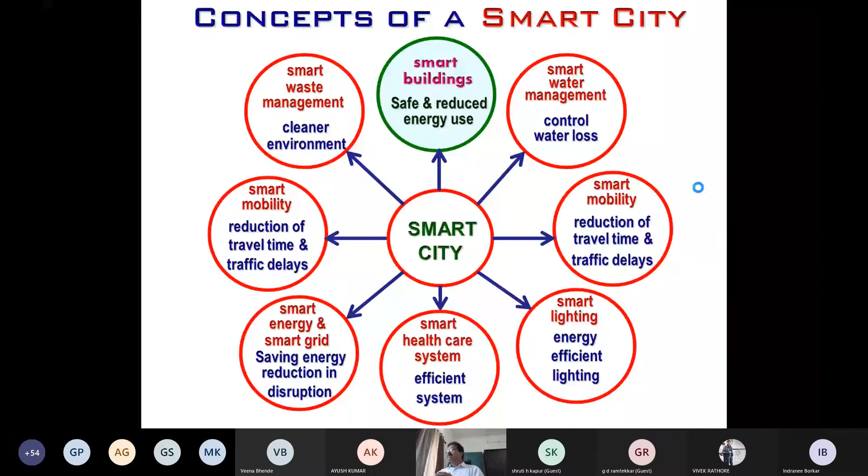Out of this, I will only focus on smart buildings, and that too, smart buildings where a building should be safe against various forces and also energy efficient. I will take up smart buildings from the view of safety against various natural and man-made forces.

What are those natural and man-made forces that we consider in the design of a building? Broadly they are divided into dead load, imposed load. It can be live load, it can be machine imposed load like this. Dead load is the self weight of the member and structural system.

Then wind load, because wind blows and has its own speed as gust velocity, so that puts force whenever some obstruction comes. We can understand the effect of wind in the sense that when huge wind blows, all those hoardings which looked very strong fell down. So wind has a natural huge force that must be taken care of during the design of a building.

Then there is one very important force: seismic force. Though it occurs very rarely, once in many years, whenever it comes it takes its attention, and buildings shatter because of that.

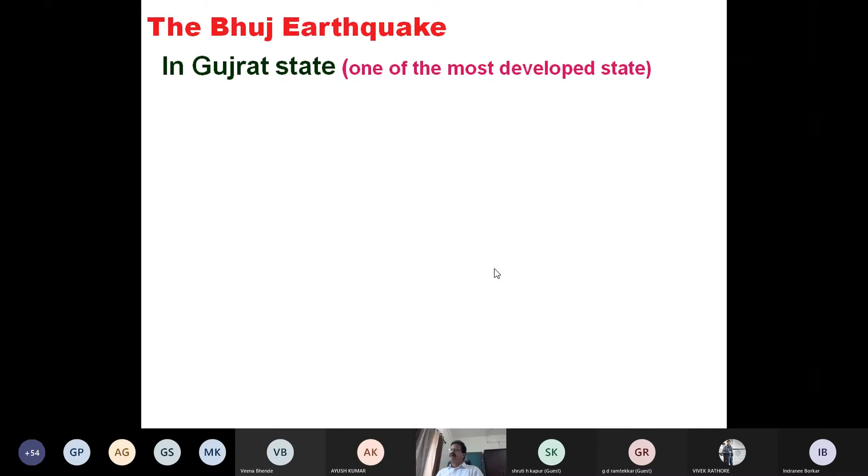In Gujarat state, which is said to be one of the most developed states so far as infrastructure and people's income point of view, an earthquake rocked the cities Ahmedabad, Bhuj, Anjar.

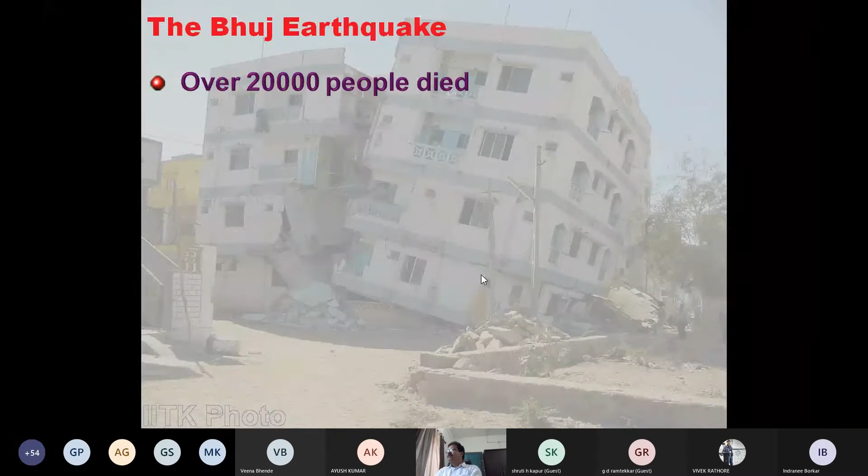The statistics then say that over 20,000 people died, over 1,65,000 people injured, more than 20,000 people sustained serious injuries, more than 100 multi-storied buildings collapsed like playing cards in Ahmedabad.

This happened for the first time, that a multi-storied building made with RCC structure, which is said to be a very good structural and configured system, collapsed due to that earthquake. This was an eye opener and a warning to the system.

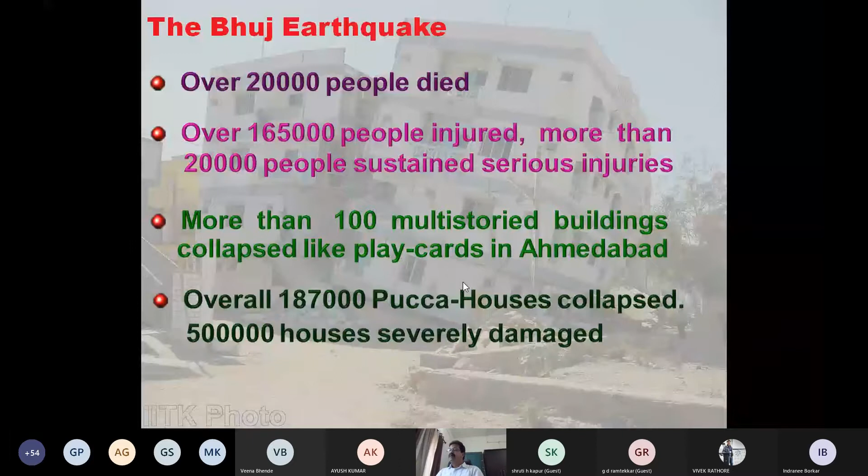Overall, 1,87,000 pucca houses collapsed and 5 lakh houses were severely damaged.

We can think of the losses in terms of money—it is huge money that was lost because of that earthquake. But it is more than that. We should not only think of the losses in terms of money, but many things happened, and irreparable losses took place with families. Somebody lost their family members, and that was irreparable. So we should not only think of the losses in terms of money, but in other social terms—irreparable losses take place if a building is not safe against such earthquake forces.

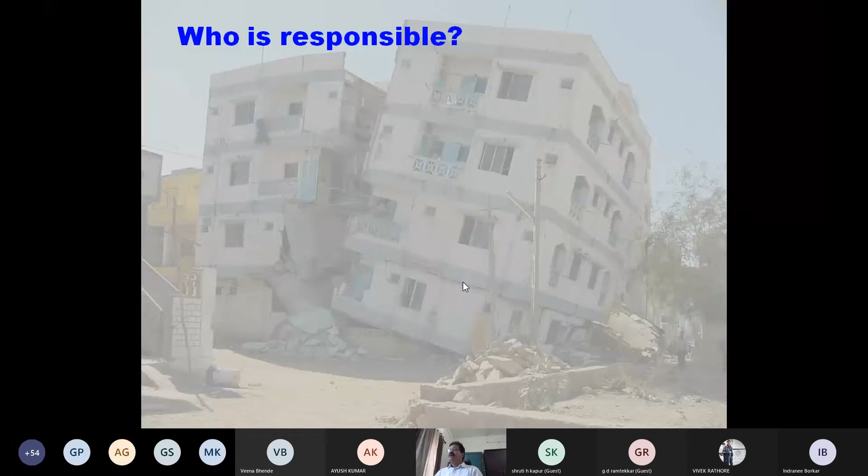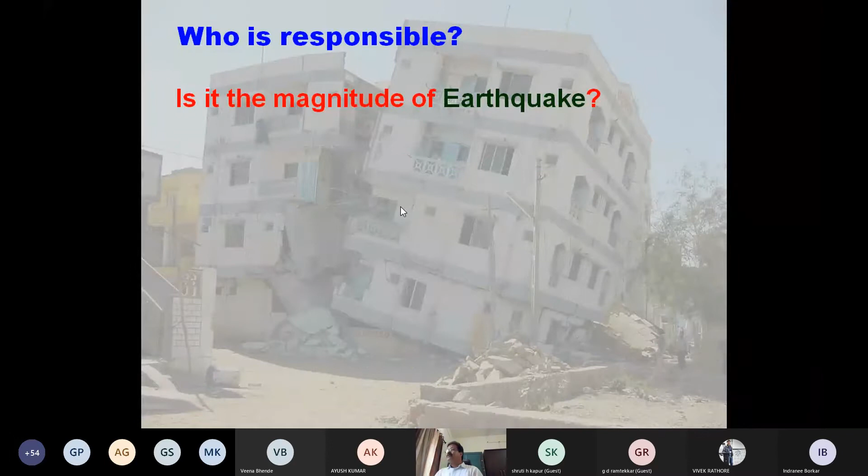So let us go into a bit of depth about who is responsible. It is not about blaming, but thinking about what went wrong and who should logically be held responsible. The two questions that come to mind are: is it the magnitude of the earthquake that caused this devastation, or the magnitude of negligence on the part of civic authorities, architects, engineers, and builders?

Here, I would like to say the role of civic authorities, architects, engineers, and builders comes very important in case of a smart city. If a city is made a smart city, then all these authorities, technocrats, and architects should be very careful and very responsible, and should behave responsibly.

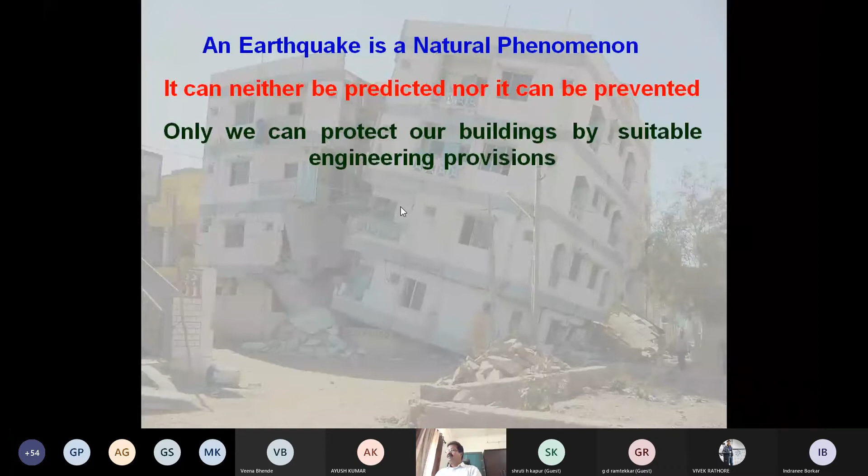Now, about the earthquake, it is well known that an earthquake is a natural phenomenon. It can neither be predicted nor prevented. One should be very clear about this. The only thing we can do is protect our buildings through suitable engineering provisions. The irony is that engineering knowledge exists - not complete, but at least sufficient knowledge is available these days which can be employed so that loss of life or property due to earthquake can be avoided.

But the enforcing law doesn't exist here. Actually, we require an enforcing law where the people who are constructing should be held responsible and should be monitored, ensuring that all these earthquake provisions are taken care of during construction.

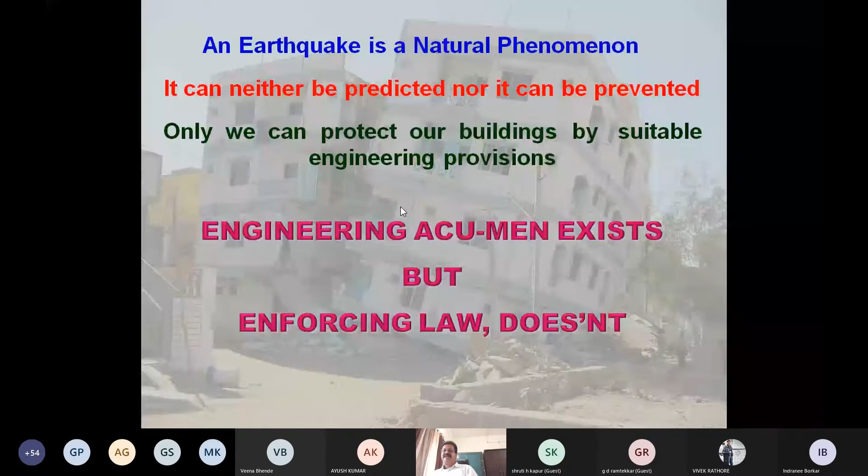So now going into that - is this slide changing? No. Yes, now it is coming.

Let us have a glimpse of the construction practices which resulted in these calamities. So if we see, there come the poor construction practices basically done. Though we know all the background science and understanding of how earthquake force affects the building and where we should take more care during construction, it all goes in vain during construction. It is not taken care of that way, and this is what happens.

This is Tagore Park apartment building in Ahmedabad, G+4 story, constructed in 1992. Here this column failed - the buckling of reinforcement due to crushing and spalling of the concrete at the top of the ground floor column. Basically it is the ground floor, the stilt floor of a building, which is used for parking purposes and everything, that becomes most vulnerable.

Under the action of forces, it is the horizontal force or the shear that hits maximum on this ground floor story at the top portion. This particular column shows the poor construction practice. Here we are not seeing the rings available.

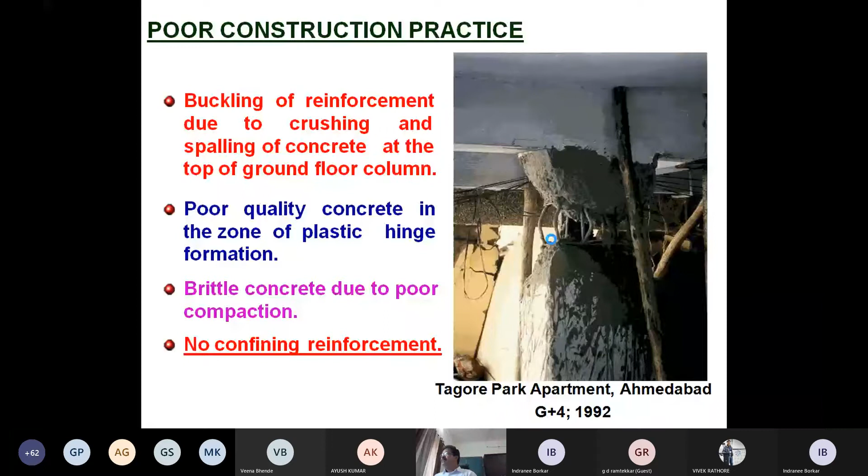Then second thing is about a building called Punjal apartment in Ahmedabad. This is having a lift core - all four walls of the lift core are made using RCC, reinforced cement concrete. This is very strong so far as lateral movement or lateral vibrations due to earthquake are concerned, so they themselves are very strong and can take a huge amount of force.

But the surrounding columns - if they were properly connected with this lift core, all these columns could have been saved. But it looks like in this building that all the other columns were not properly connected with these shear walls. Not properly connected means the beam connecting all the other columns was not embedded - the reinforcement was not well embedded in this lift core. That is what happened during the vibration due to earthquake - the connection failed, and all these other columns collapsed due to the earthquake forces, resulting in the collapse of the building with 4 casualties.

So there was no mechanism to transfer force to the lift core. No anchoring or continuity of slab and beam reinforcement to the wall of the core. Shear failure of columns led to the collapse as the core was not effective. This is how the mistake took place and resulted in 4 deaths.

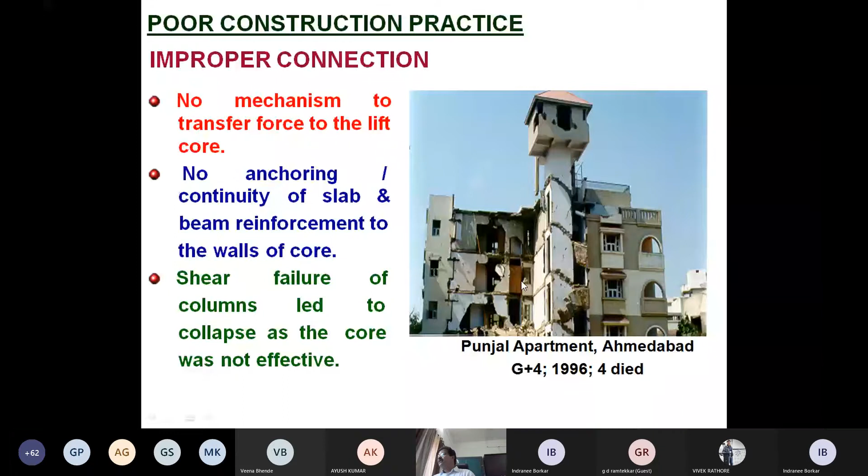This is another poor construction practice where this corner column failed during an earthquake. Corner columns are subjected to the highest amount of forces because the seismic center of mass and center of rigidity don't match in one point, causing the building to twist along with vibrating—this is called the torsional effect. Because of this, corner columns are hugely affected when the building is under twisting motion. What happened here, at this location, is a beam-column joint failure.

This vertical member is a column and this is a beam. Under the action of earthquake forces, failure may take place either in the column or in the beam, depending on reinforcement detailing. But in this case, the column was weaker compared to the beam, so when the earthquake struck, failure took place in the column.

Remember, failure of a column is catastrophic—it means the whole structure will collapse. Whereas failure of a beam is localized, only that beam fails, nothing else. Failure of a slab is even more confined, a small localized failure. Here, column failure took place, and because of that the whole building collapsed.

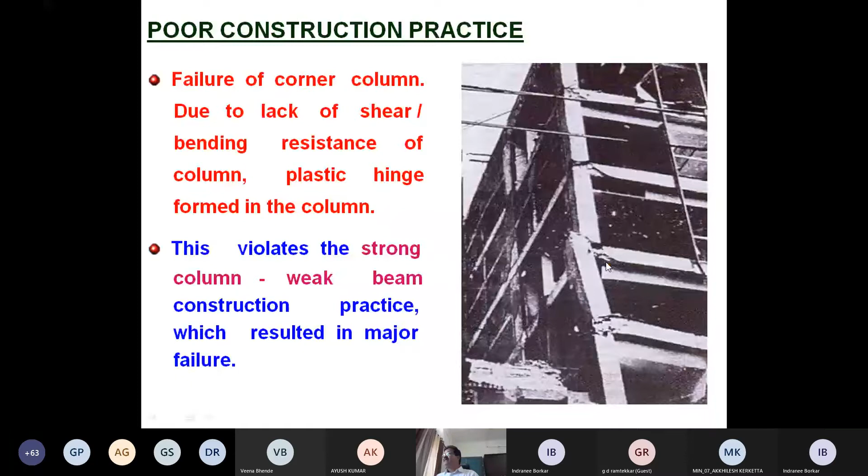This violates the necessary regulation for seismic design: the column should be strong and the beam should be weaker compared to the column. This means whenever a beam-column joint fails, the failure should take place in the beam rather than in the column. Here, the failure took place in the column, and that is how the collapse of the building occurred.

Another kind of failure: this is a G+4 story RCC framed structure constructed in two stages—first two stories built, then after a few years the later two stories were added. Because the upper column was not properly anchored with the lower column—probably due to insufficient length of reinforcement available at that time—people said 'yeh chalta hai' and constructed it that way, leaving a weak joint between the older column and the new column above the second story.

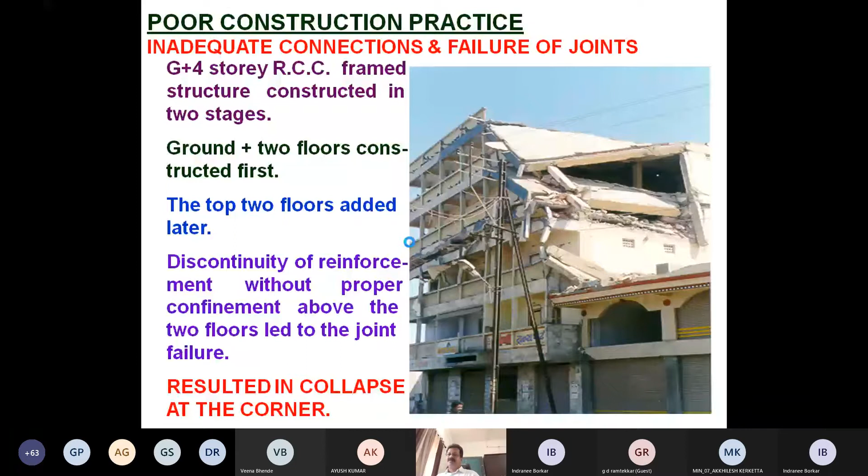This is another example, of a short column. In the normal case, there is a boundary wall, and naturally there is a gap between the floor and this boundary wall. But as soon as this gap is closed up like this, this part of the column becomes a short column.

From the point of view of any gravity load, like dead load, live load, imposed load, and even from the wind force point of view, having a small or short column is a good thing. It makes the column stronger and stronger. But when it comes to earthquake, it is just the opposite.

An earthquake vibrates things, causing a deviation of one part of the column with the upper part. The magnitude of deviation is whatever the earthquake's magnitude dictates, and the more the deviation, the more the sway of the column, resulting in a huge amount of force.

As civil engineering students may know, the moment generated in case of a sinking support of a fixed beam is 6EI delta upon L square. Here, L is small, so 6EI delta is large upon a smaller L square, and thus the magnitude becomes too large, just because of the shortening of this column. This is the short column effect.

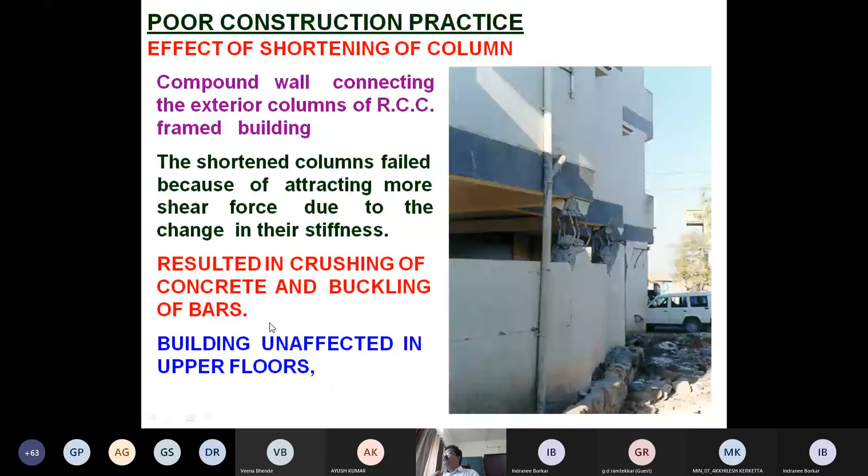Civil engineering people may understand the concept of development length, that reinforcement must be embedded within the concrete by a certain amount to develop a particular quantity of stress within the reinforcing bars. This is a classical example where the reinforcement was not properly embedded in the concrete and it just slipped away from the concrete. It did not take any resisting forces, no stresses were generated within the bars, and it just pulled away from the system as if it was cast on a soil mass, something like that. This happened, and because of that, this particular column failed.

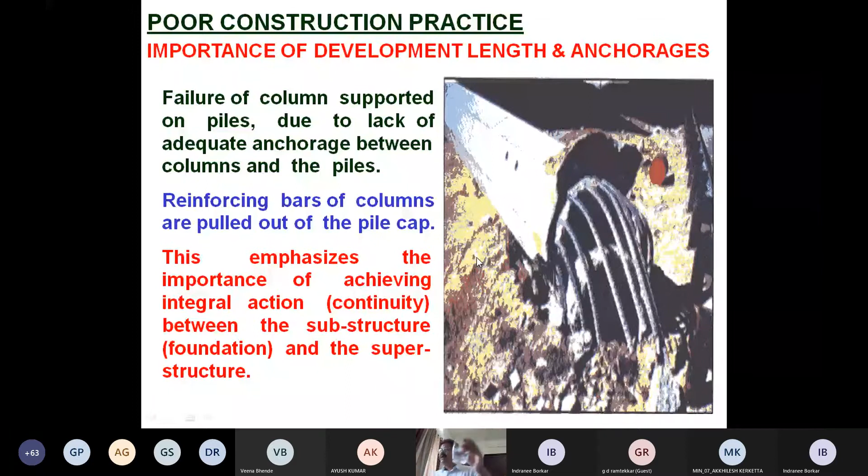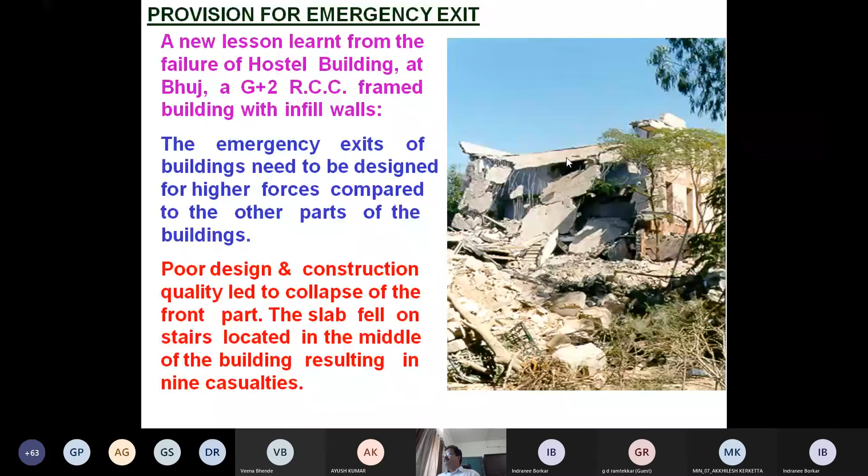This is another example showing the effect of proper connectivity of the shear wall. This is the lift core wall. Here there is a staircase connected to a lift core where a lift is available. Since this lift core is made out of RCC and properly connected with other parts of the building, all these columns were properly connected through these beams with the wall.

What happened due to earthquake? The maximum force has been attracted by this lift core portion, and at the cost of that, this lift core failed. This lift core got huge cracks, but all the other columns are saved because of that, and hence the building is saved from collapsing. So this is how proper connectivity makes a difference and saves a building from collapse.

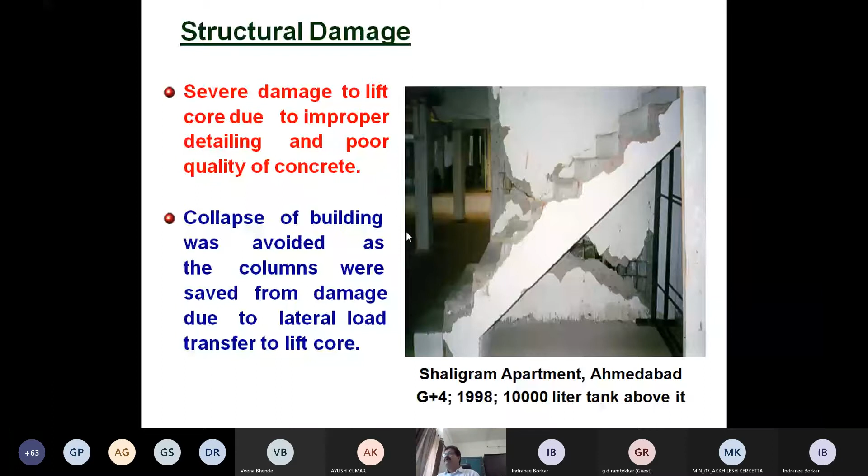Here it is just opposite to that. This column, sometimes we may think it is a failure, but it should not be looked at like that. It is actually passing, because this particular column is so properly confined by the reinforcement that even after this kind of buckling and vibration, the concrete inside the column has not come out. And when it has not come out, the capacity of this column to take the vertical load still remains there, and because of that, the collapse of the whole building is saved.

The building is saved from the collapse. And that is how confinement of the concrete is of prime importance in case of earthquake resistant buildings.

So we must take care that civil engineering faculties appreciate these things, that we do not give much importance to the rings in columns or shear reinforcement in beams. In case of beams, sometimes we calculate the shear reinforcement required, but never do we calculate the size and spacing of the rings required in a column. It is a neglected thing.

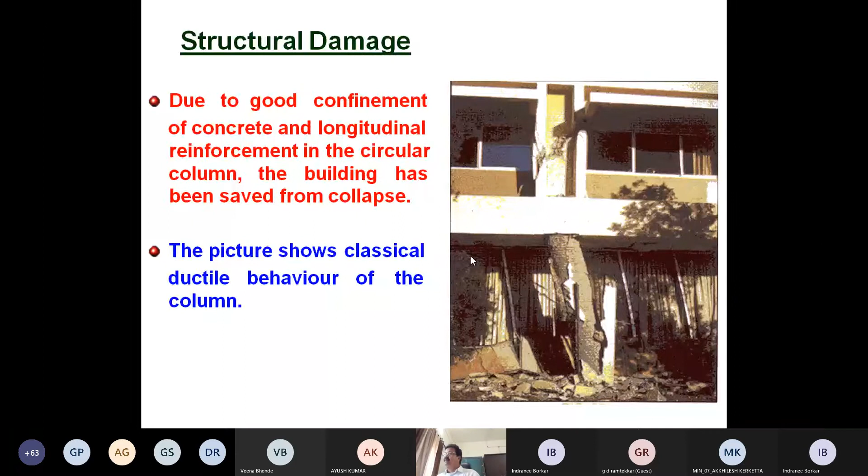So in this way, if I want to ask what kind of behavior we want from a building, this actually shows the kind of behavior we want. This is the example of the twin towers, and in 2001 when it happened, people posted this kind of animation. So basically we require a flexible structural system. Flexible means large deformation is there, but its capacity to take the vertical gravity load should still remain. If a building is that kind of flexible, that large deformation is permitted, but even then it does not lose its vertical load carrying capacity, then that kind of building system is the most appropriate from an earthquake point of view.

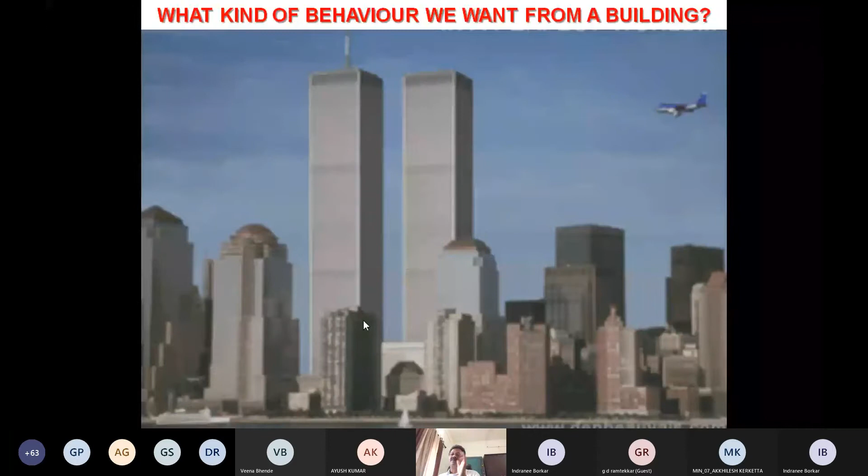Now with this understanding, let us go into the heading of the topic: required seismic considerations for buildings.

Now here an important note is there. Henry Degenkolb, who died some years back, was a noted earthquake engineer, and he said: if we have a poor configuration to start with, all that an engineer can do is only provide a band-aid to improve the basically poor configuration as best as he can.

He gave so much importance to the configuration of the building, meaning the layout plan, its vertical configuration, its horizontal configuration. He gave so much importance to that, that if the configuration is poor, not much can be done by the site engineer. A building of poor configuration will definitely give a bad result and behave very badly during an earthquake, however much attention is put in by the site engineer.

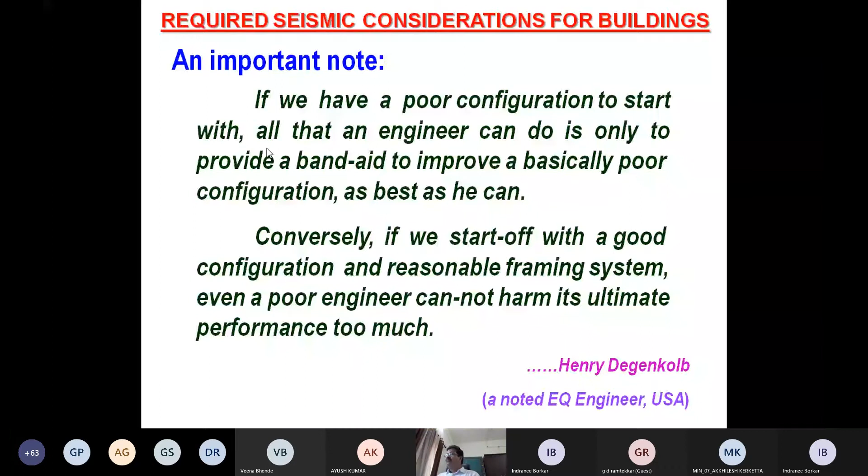Conversely, if we start off with a good configuration and reasonable framing system, even a poor engineer cannot harm its ultimate performance too much. This seems contradictory: if you start with good configuration and reasonable framing system, even if there is a poor, unknowledgeable person at the site as engineer, he cannot harm the structural system. The structure will perform well even with a bad engineer constructing it. These two sentences make it clear that configuration and reasonable framing system are the essence of earthquake resistant buildings. So now we are going into that configuration.

Seismic considerations during planning. I will talk about plan configurations, meaning how the system should be laid out in plan. So you just see all these kinds of buildings that we come across.

This is a too tall building with slender cross section, meaning the cross section is very small but the height is too large. This is another building which is too long, meaning the length compared to the other two dimensions is very large. And this is a building too large in plan, meaning its length and width are too large.

All these things—too large, too tall, too long—are not good from the consideration of earthquake resistant building. What happens whenever there is an earthquake hitting? Say for example if this building is too long. Earthquake is actually waves; it comes through the soil strata as waves with certain wavelength, and all those phenomena are associated with vibrations.

Naturally, the way one particular part is vibrated by the earthquake, another part may not have the same kind of vibration. It may be vibrated differently with a certain lag—first this part vibrates, then the vibration moves to another location. When one part was vibrating, another part came to a standstill, so the whole building is not vibrating simultaneously. Had the whole building vibrated simultaneously, the behavior would have been more proper.

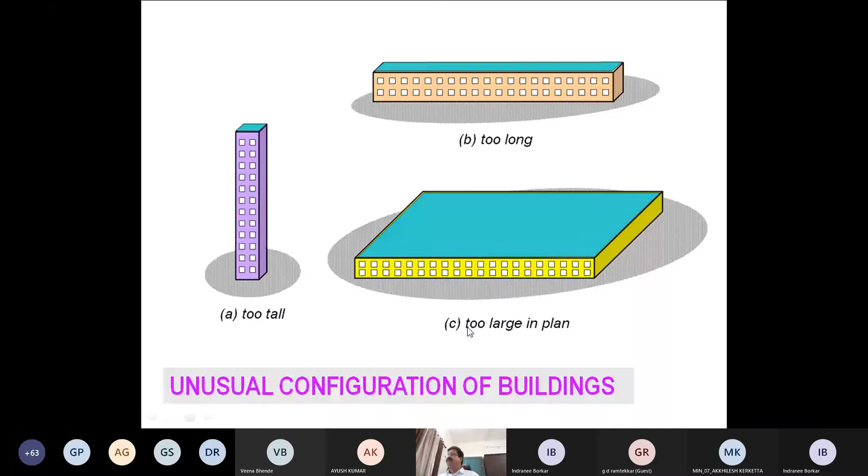This is how, in Bhuj, a building that was too long had one part collapse because of this consideration—that it was too long a building.

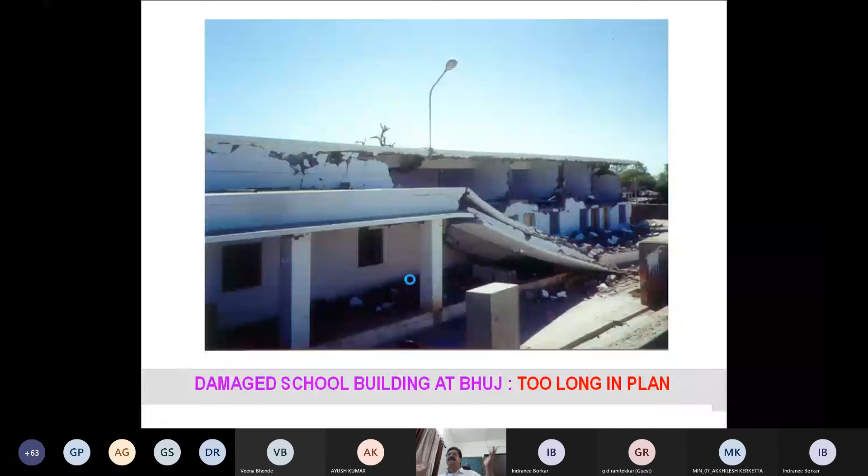What should we do in such cases? Naturally, big buildings are the need of the hour, so large, too long, too large buildings are actually being constructed. Under these conditions, can we give a separation joint or construction joint at various locations, so that when this part is vibrating, the whole vibrates together, and it doesn't matter whether another part is vibrating or not.

In that case, I can say this part as a whole is vibrating, this part as a whole is vibrating, and this part as a whole is vibrating. Since there is no connection between them, the vibration of one part does not affect the vibration of another.

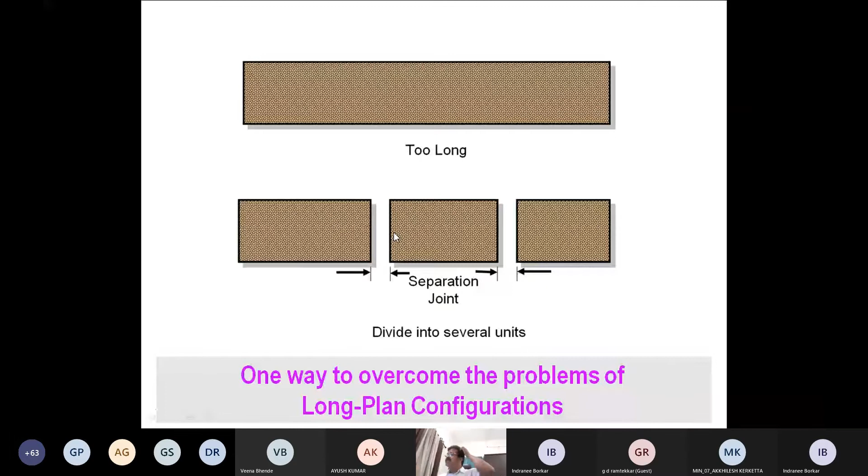Each part of the building vibrates in its own way with its own capability, and this creates additional stresses because some parts vibrate while others do not. This lagging of vibration creates additional stresses. A separation joint can be provided in such situations if the building is too large, allowing it to behave well under earthquake.

There is another kind of building - many buildings are L-shaped, T-shaped, cross-shaped, I-shaped or E-shaped. Many such shaped buildings exist in government, private, and public sectors. I already gave one example where there was a T-shaped building where the T portion collapsed during the earthquake. Actually, what happens?

We do not know the direction of vibration that will occur due to an earthquake. Say for example, this is an L-shaped building, and if the vibration is taking place as my cursor is moving, this is the direction of vibration. Naturally under this condition, this particular part has different and larger stiffness compared to this portion, because this is smaller in width and its stiffness is much smaller compared to the stiffness of this portion under this kind of vibration.

If this kind of vibration is taking place, then this portion becomes too stiff compared to that portion. That is how the stiffness change occurs in the building, and under earthquake effect, this sudden change in stiffness makes the difference, resulting in concentration of stresses at such locations.

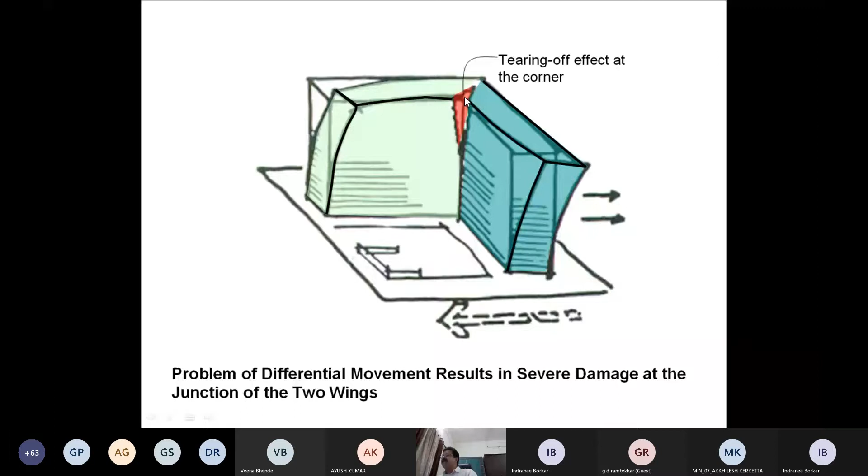So a building should be constructed in that way when it has a reentrant corner. Sometimes, as I said, this corner is severely affected and subjected to stress concentration and failure. So this corner portion must be given due attention, and the beams and columns of this portion should be designed accordingly so that failure due to this stress concentration does not take place. Alternatively, you construct in that way, but naturally that kind of construction will be costlier compared to normal.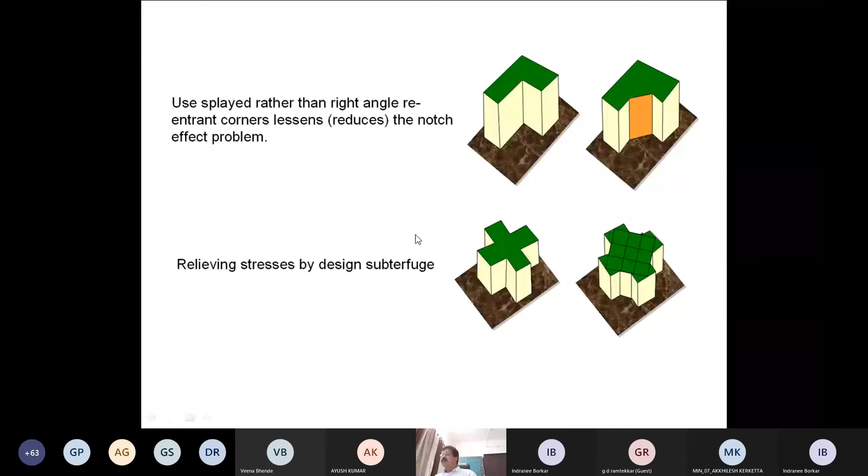These are the code provisions as per IS 13920, ductile detailing provisions, where these kinds of figures are also given. If your building is L-shaped, provide a construction joint like this. If it is T-shaped, Y-shaped, or E-shaped, similar construction joints can be provided.

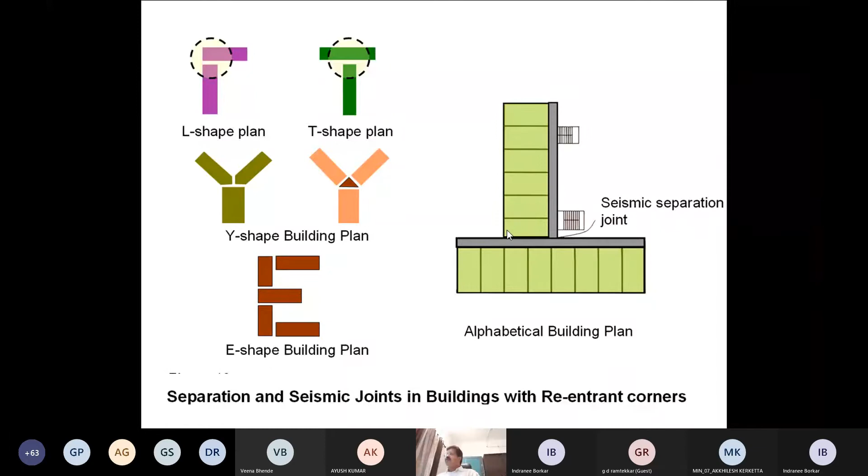Now let us come to another concept of the building, that when a building vibrates. As per vibration theory, vibration means the mass of the building is vibrating, and as the mass vibrates, it is under acceleration, to and fro changing acceleration, and when mass is under acceleration, it results into inertia force.

Now, the inertia force of the whole body, if this particular building is vibrating in this way, the center of that mass, taken as the resultant location, is the center of mass, and this is the mass in which it is vibrating.

What is resisting it, what brings it back? If a system is taken away, meaning if one portion is kept here and the other portion is vibrated, what brings it back is the rigidity or stiffness of the system. That applies its own resisting force to bring it back. The resultant of that force, wherever it is acting, is termed as the center of rigidity.

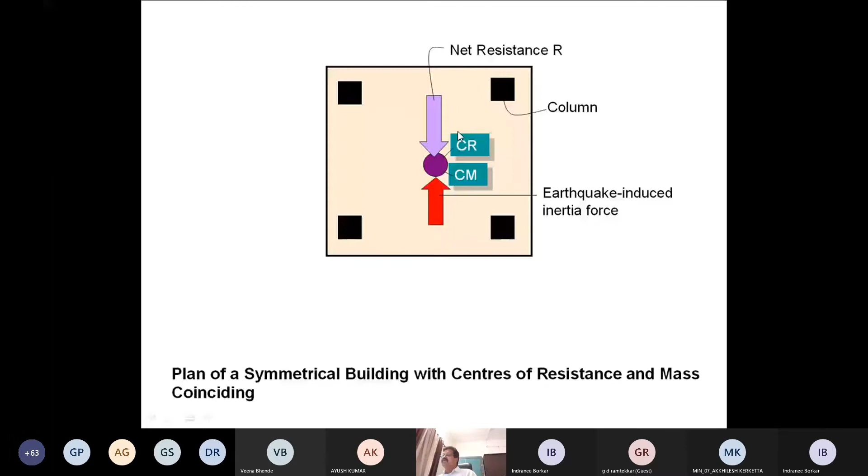As I will show in this figure, though the building looks symmetrical in plan, in construction a shear wall arrangement was made here but no shear wall in any other portion. From the rigidity point of view, this makes the system much stiffer here, so the center of rigidity or action of elastic force will be more concentrated at this location. However, the mass is distributed across the whole building, and its center of mass may be at the center of the building. So this is the action of inertia force and this is the action of elastic force, and when there is a difference in the location of these two actions, it leads to the generation of a couple.

This couple basically tries to twist the building. So a twisting or torsional effect is an additional thing that comes up because of this asymmetry of the system, where the elastic force concentration at the center of rigidity does not coincide with the center of mass. This leads to extra twisting of the system, creating extra stresses particularly in the column portions, leading to failure of the structure.

One such example I gave earlier, where because of this twisting the building collapsed. Had this been made symmetric in plan instead, its center of mass would pass from this location.

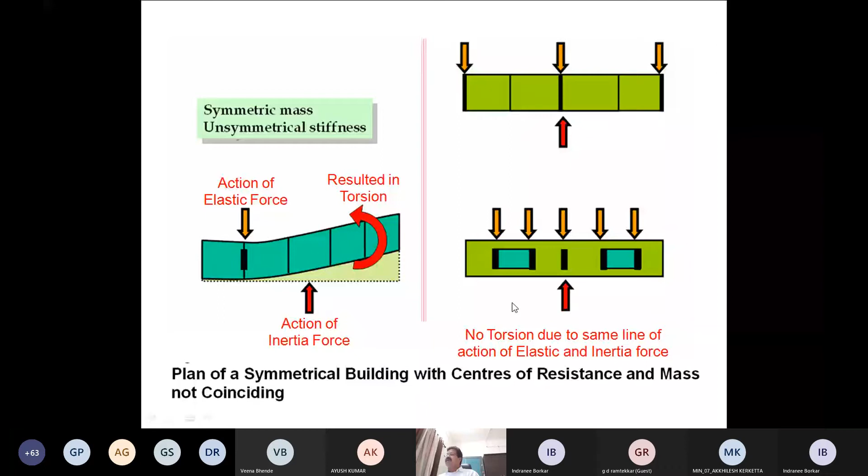As said earlier, we do not know which will be the direction of earthquake motion. It can take the building moving in this direction or in that direction. In this particular example, it seems earthquake is made to vibrate in this direction.

Now here there is a shear wall, so naturally the center of rigidity is associated with this location. However, since this looks symmetric in plan, the center of mass is somewhere at this location. So inertia force is acting here, elastic force is acting here, thus causing twisting of the building, and this may lead to high stresses in this corner column.

Now if the same building is vibrating in this direction, we do not know which one will be the direction of vibration. If it is vibrating in this direction, then fortunately the location of the inertia force and the location of the elastic force will be in the same line, and hence there will not be any twisting in the building under this kind of vibration. But this building makes sense only under a particular kind of vibration; under the other kind it is causing twisting.

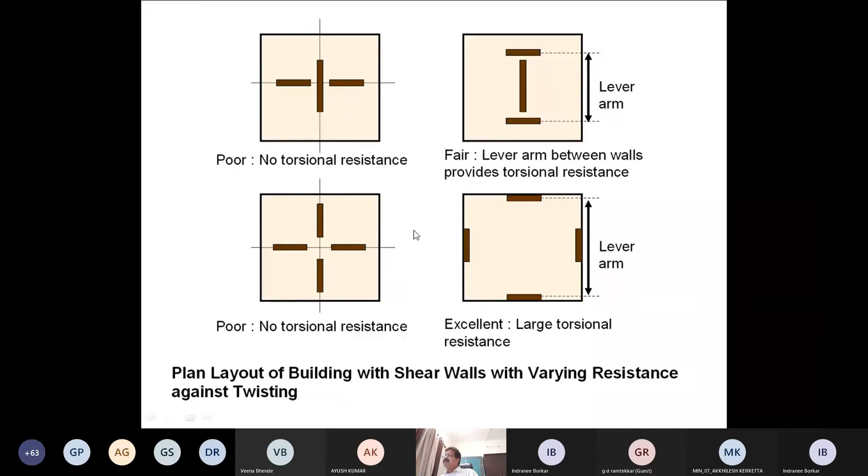This is what I have talked about regarding plan configurations. Now let me talk about the vertical configuration. There is this kind of building we come across, having a large plan area at the bottom and then a smaller plan going up in height.

This is another kind, with setbacks, a typical construction where the bottom portion has less plan area whereas the top portion has a larger plan area. Another common kind is a multi-story building where the bottom columns are unfilled, with no wall infill, whereas the upper portions are filled up with walls. So this is the infilled wall portion, and this is the bare column portion.

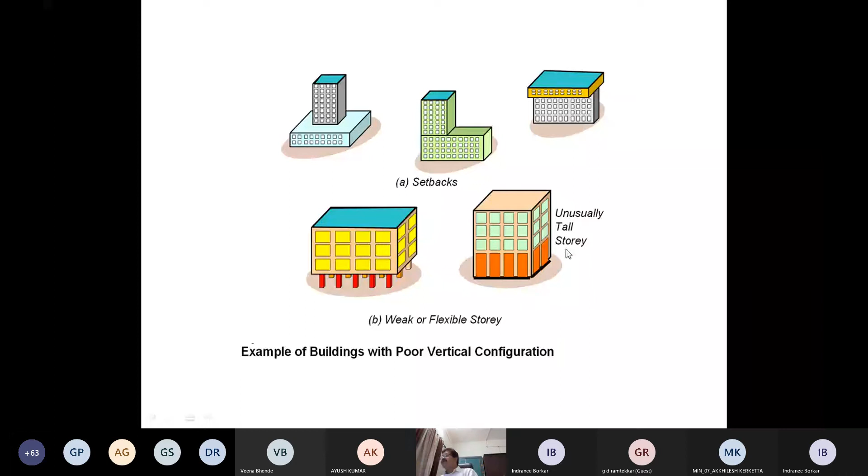It is called a soft story, this kind of construction. Here the height of the column is too large compared to the rest of the columns, having an unusually tall portion. These are the various kinds of vertical configurations we may come across in building systems.

Now there are other configurations also, that in a hilly area this kind of building construction we usually see. This particular column is long, so this column is large, long, whereas these other columns are short to some extent. This is one kind of structural system in the ground, though not advisable, but it happens.

This is a peculiar type of construction when the greed of the builder says that as per Nagar Nigam or municipal corporation guidelines, I have to take this much part from the ground, but the upper part I can expand. This kind of system happened in many places. Here, during an earthquake or otherwise, this particular floating column is putting its force like this, but the way this load is transferred to the ground below is by giving huge bending here, then huge bending here, and only then will it pass through.

This basically leads to the failure of the structural system. Here there is a stress concentration at this location, and this is called a load path, and this kind of a load path should not be there, in this kind of a construction system.

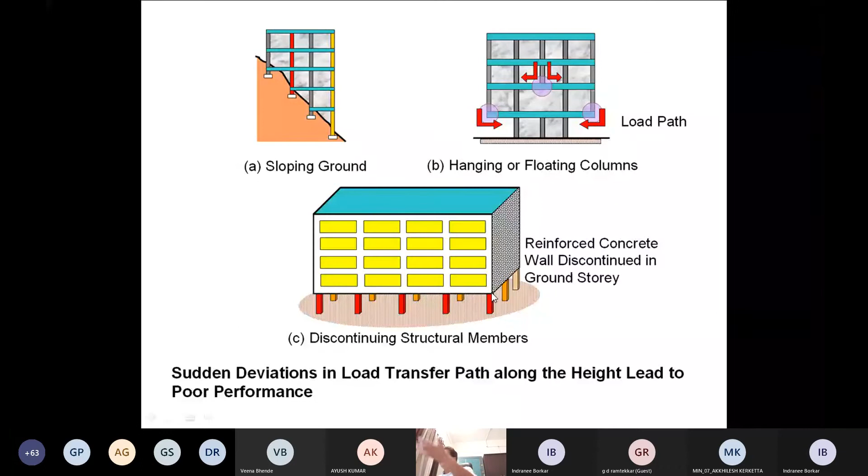So an open ground story building is the same thing. This schematic diagram shows what happens if the upper portion is filled up with walls and the bottom portion has bare columns.

Now, due to earthquake, this has to vibrate. But instead of a smooth deflection, 100% of the deflection takes place in this portion, and the rest of the portion remains straight. So this particular portion is too highly stressed, leading to failure of the system. This is called a soft story.

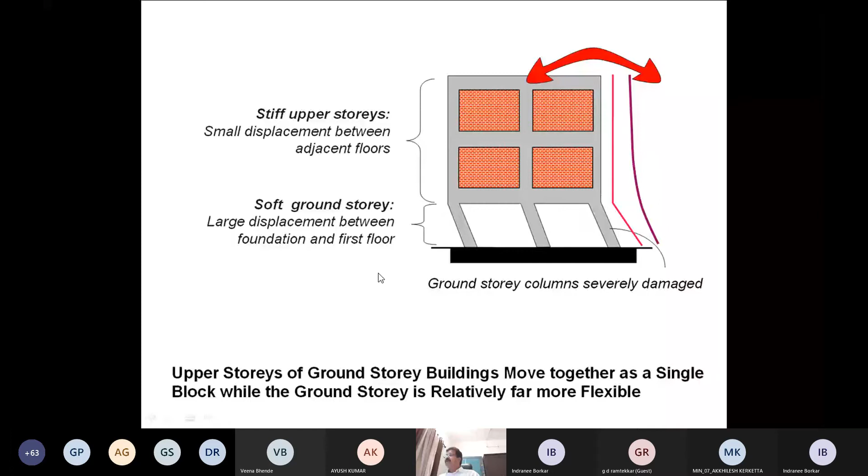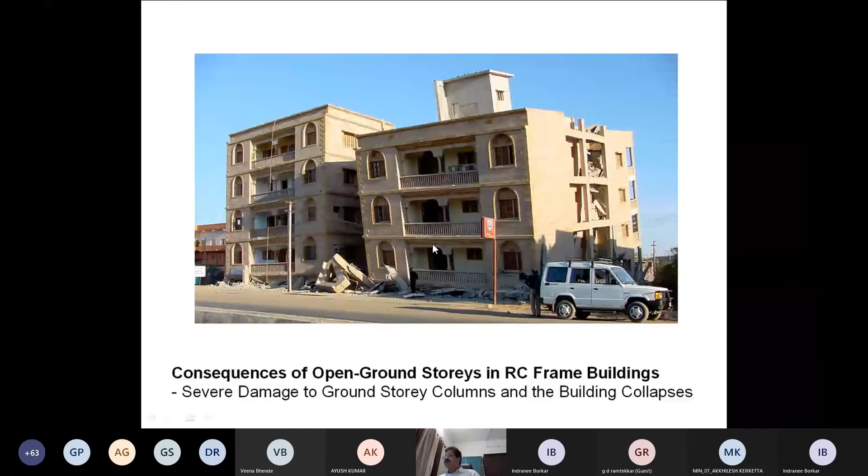This is what happened in soft story cases of a building. This is another example of soft story: two buildings constructed as 4-story buildings with a soft story. Because of the earthquake, nothing happened to this one. However, this building collapsed and is now only 3 stories. It looks like a 4-story building from outside, but it remains only 3 stories—1 story is gone. This is how the soft story has affected it.

This is another example of this infill wall effect. What can be done now?

If it is matching, in consideration with the upper story, then that soft story concept will not arise, and hence the failure of that bottom story will not take place. The sway or lateral displacement will be uniformly distributed across the height of the building, and the bottom portion will not be subjected to too large stresses. Rather, it will be subjected to less stress, distributed across the length, and the collapse of the building can be avoided.

This is one remedial way. The other remedial way is, if this kind of construction is needed, then this bottom stilt portion should be made with a heavier column section, so that it is stiffer. As compared to the upper column, the stiffness of this column is made too large, and the summation of all the stiffnesses becomes equivalent to or comparable with the stiffness of the infilled system above. If so, then the failure due to soft story can be avoided, and the building can be saved from collapse.

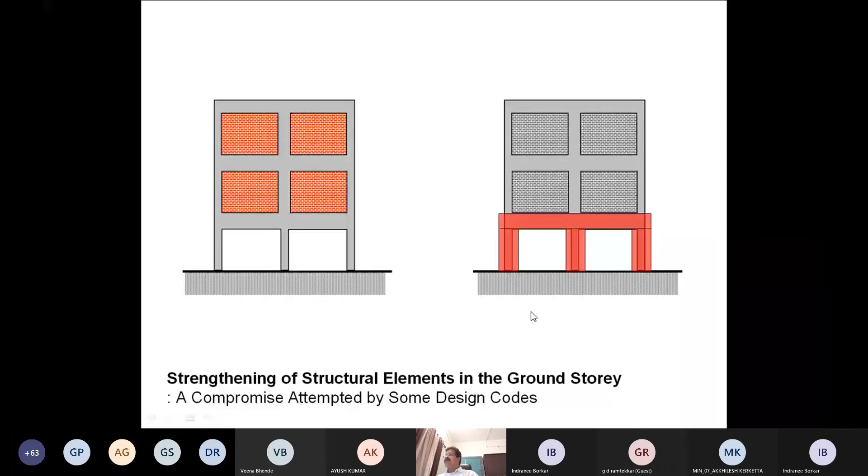But if it is giving a to and fro displacement to the building, and if delta is the displacement for this large, long column, and the same delta is given to this short column, the force generated is 6EI delta upon L square here, and 6EI delta upon L square here. If this length L is 2 times the length of the other, then the force generated here is 4 times higher, because it is 6EI delta upon L square - the half will be 4 times greater.

Similarly, shear force will be 12EI by L cube, meaning it is 8 times subjected to higher shear than this - 2 into 2 into 2. So this is how the short column effect comes in case of earthquake forces.

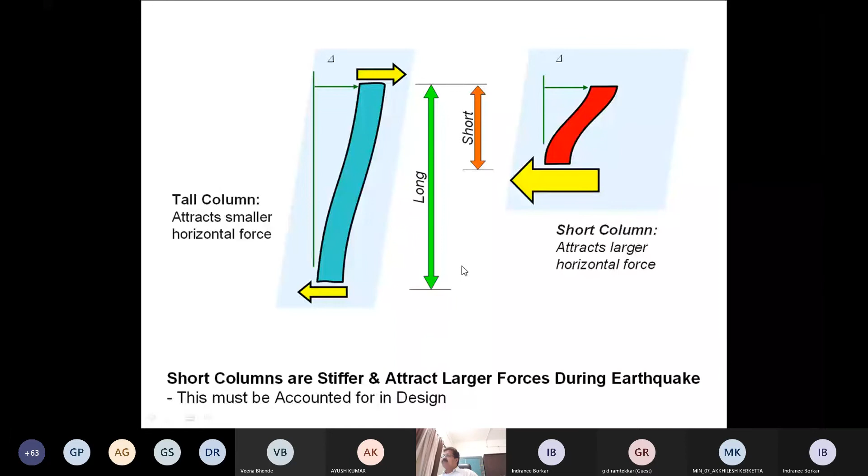This cross failure or cross cracks represent that it was subjected to vibration, because it is vibration that brings out tension in a cross pattern. Once it is vibrated in this direction, there will be tension in the perpendicular direction. Then when it vibrates in the other direction, the direction of tension will be in another plane, and thus it is a cross type of failure that takes place in the building.

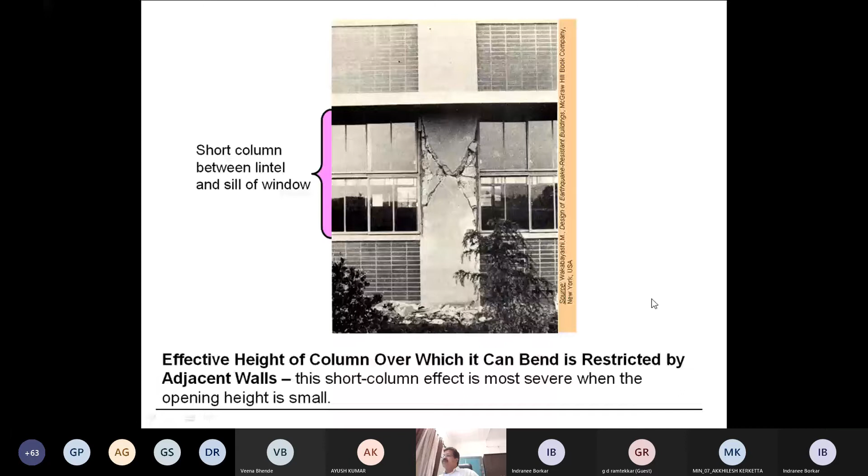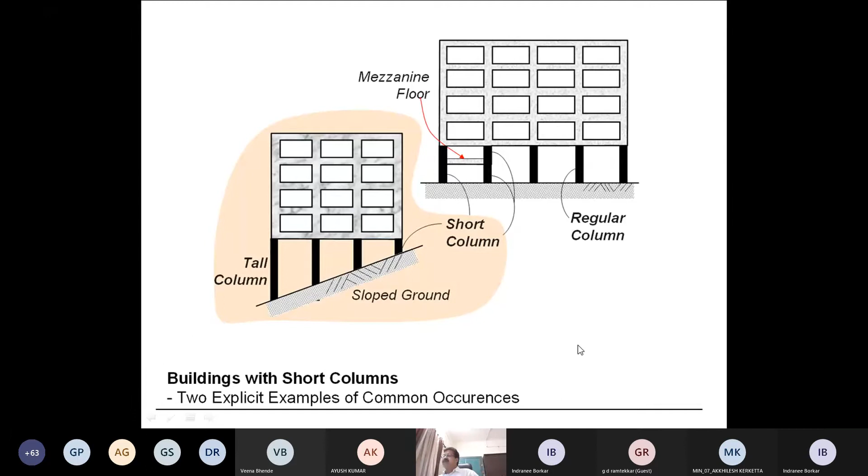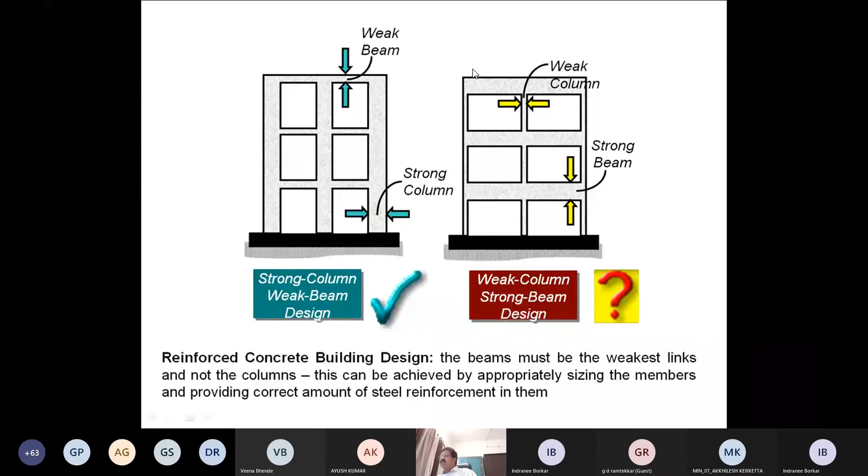This is another example of weakness. Now we have to compare strong column weak beam versus weak column strong beam. In this comparative study, as I said earlier, the collapse of a column is catastrophic and the whole building collapses, whereas failure of a beam is a localized failure. Naturally, during an earthquake, we would like to have, if failure must occur, a localized failure rather than a catastrophic or complete failure of the system. With that philosophy, we always prefer a strong column and weak beam comparatively, rather than a weak column and strong beam system, as sometimes happens. So this is the concept of weak beam and strong column system.

What about setbacks? Naturally, setbacks will lead to different stiffnesses, and then there is variety in the vibration. Sometimes we see that the earthquake has come and vibrated, but when the earthquake comes and goes away, the building still keeps on vibrating.

It is similar to if I have a steel rod, and at one end I have kept it fixed, and at the other end I put a hammer on it. As soon as I hammer it and leave away the hammer, the rod will still be vibrating for some time. The same thing happens with the building.

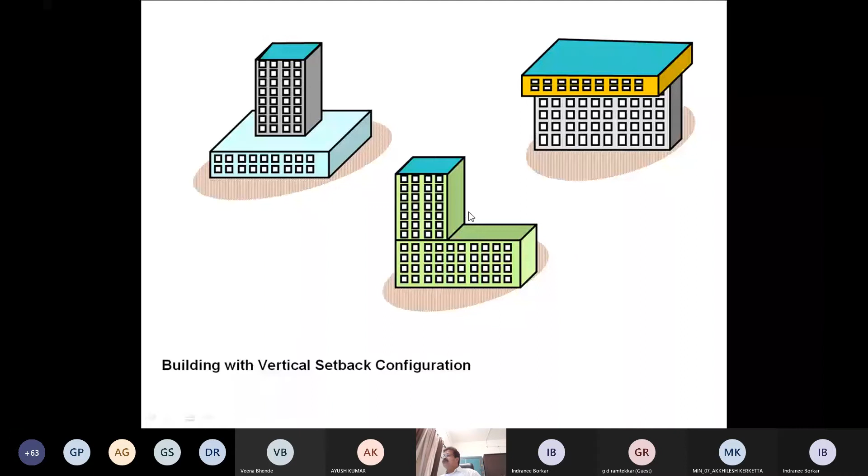The earthquake comes and goes away in a fraction of minutes - hardly 10, 20, 30 seconds, the earthquake has come and gone. But the building keeps on vibrating for minutes, because once the energy is imparted, the building is vibrating, and in that vibration, this part wants to vibrate in a different way compared to this portion, because of the change in their stiffnesses. Because of this, there is stress concentration taking place at this reentrant location, leading to collapse of this part of the building.

And that is what happens. And if we want to avoid this, then the building should be constructed in this way.

There are many limitations when it comes to earthquake design. It is a tedious way of designing the earthquake system, so there must be good collaboration between the architect and structural engineer. The architect should also understand the structural system's behavior under earthquake, and only then can a proper, safe structural system be evolved.

These are various recommendations: buildings regular in plan and elevation, without reentrant corners and discontinuities in transferring vertical load to the ground, display good seismic behavior.

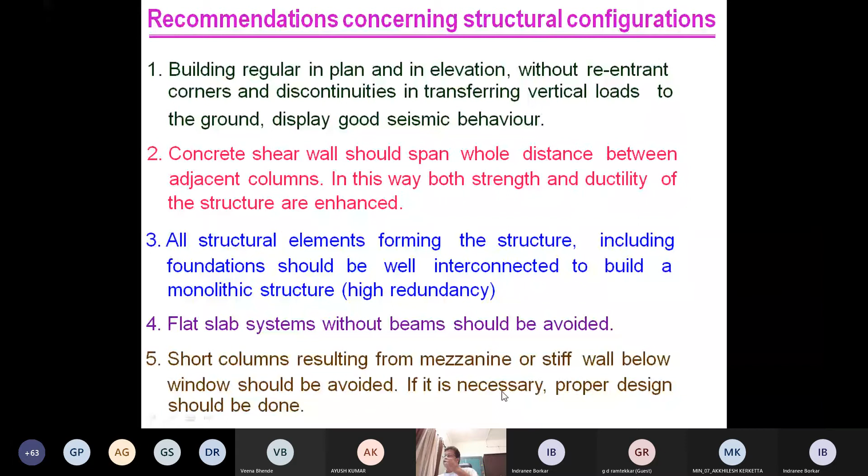Short columns resulting from a mezzanine or a stiff wall below a window should be avoided. If it is necessary, proper design should be done. There are ways to avoid these bad conditions.

Large discontinuities in the infill system, such as an open ground story, should be avoided. The structure should be composed of strong columns and weak beams. It is advisable for the structural system to include a second line of defense formed by ductile frames.

Now, what is the ductile frame? We will talk about that a bit later. But the concept of earthquake resistant design is that a huge amount of earthquake force is actually imparted to a building, and if we like to design it to behave elastically, then nothing less than a pyramid of Giza will be constructed — meaning a huge 100-meter by 100-meter structure for a 10 feet by 10 feet room.

It is that kind of structural system that would result if we required a building to behave elastically during an earthquake. We cannot afford that. Under that situation, a ductile system comes to our defense — a system which is ductile enough to reduce the effect of earthquake forces by virtue of its displacement and the micro cracks that are generated. That is the concept of ductile framing.

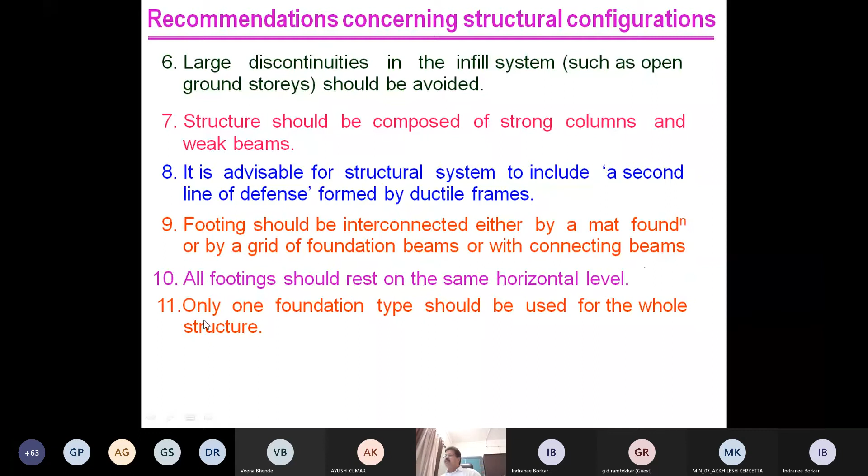Footings should be interconnected either by a raft foundation or a grid foundation, with connecting beams. All footings should rest on the same horizontal level. This is one of the challenges in hilly areas — it may not be possible, but from an earthquake behavior point of view it is a necessity. Only one foundation type should be used in the whole structure.

Then let us talk about important points for a better seismic resistant structural system.

Heavy buildings attract more earthquake forces, because as the mass is higher, with mass multiplying by acceleration, it creates a huge inertia force. So naturally, a heavy building attracts more earthquake force than a lightweight one.

Try to avoid heavy weight, particularly in the upper floors. If heavy weight is at the upper floor, there is a huge force applied at the top portion, whereas it is supported at the bottom foundation level, creating too large a moment. So as we go higher in the building, if the building is becoming lighter and lighter in the upper stories, it is good for the health of the building under earthquake. Otherwise, people who are fascinated about having a swimming pool at the top of their building — this is too dangerous during an earthquake.

An increase of stiffness for the sake of reducing deflection and vibration results in large lateral inertia forces. With a stiffer system, we should make it stronger also. Stiffness and strength are two different things. Stiffness is related to EI, so that deflection is lesser, or something like that. But strength is about whatever forces it is subjected to, and whether reinforcement for RCC is available for that or not.

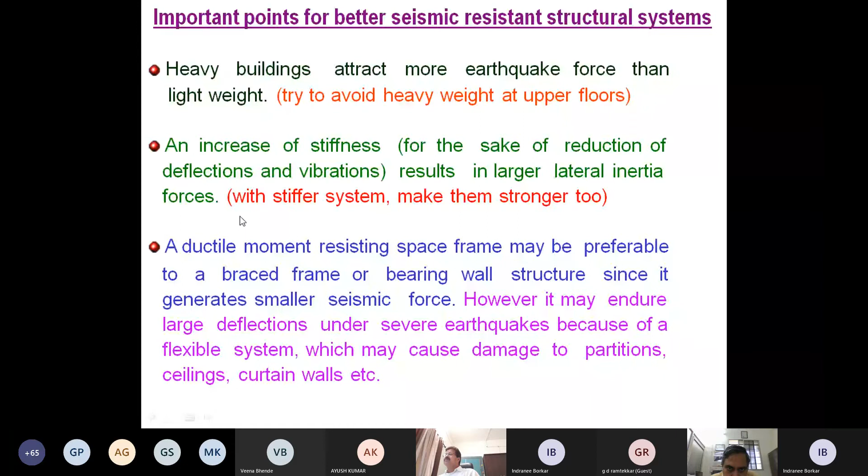The ductile system is the most preferable system. A stiff building resists deflection, thus reduces damage to non-structural components, particularly in moderate earthquakes, but does require more structural material.

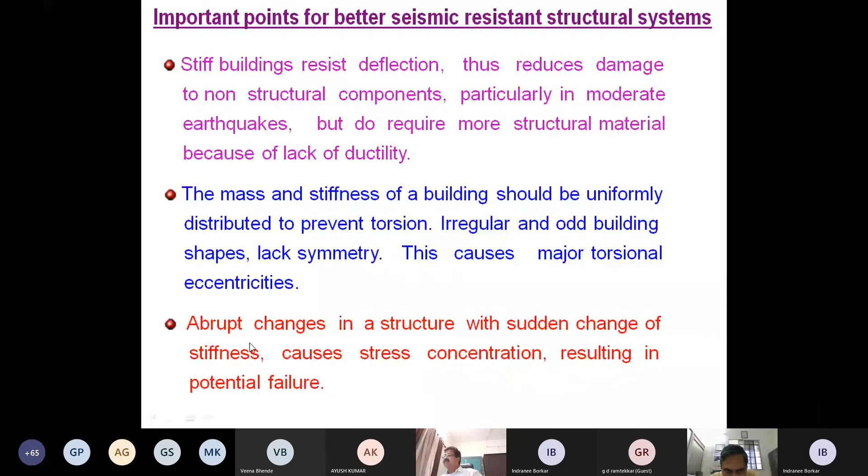The mass and stiffness of the building should be uniformly distributed to prevent torsion. Abrupt changes in structure with sudden changes of stiffness cause stress concentration, resulting in potential failure. These are all about the structural configuration that is required - what kind of configuration is good for an earthquake system and what is not, so far as plan configuration, vertical configuration, or center of mass and center of rigidity are concerned.

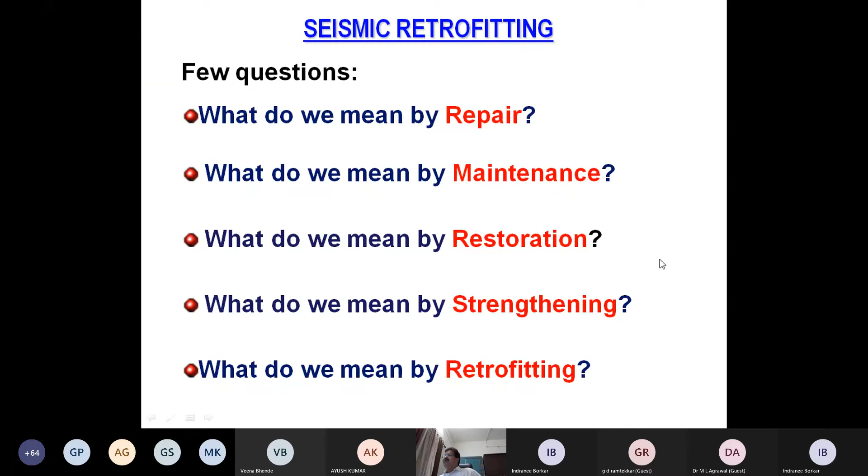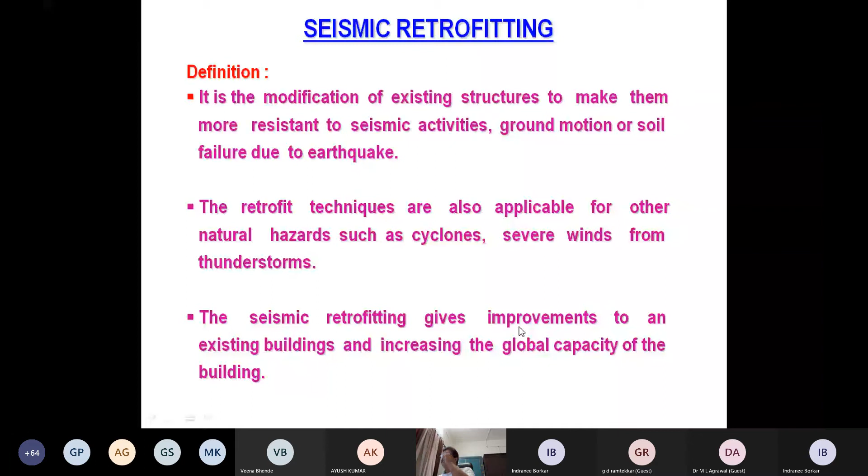There are various ways in which seismic retrofitting, or strengthening of the building, can be done. In both senses, there are various ways to do that, and they are broadly classified like section enlargement, external steel plate bonding, post tensioning of the system, ferro cement laminates, and use of fiber reinforced polymer composite.

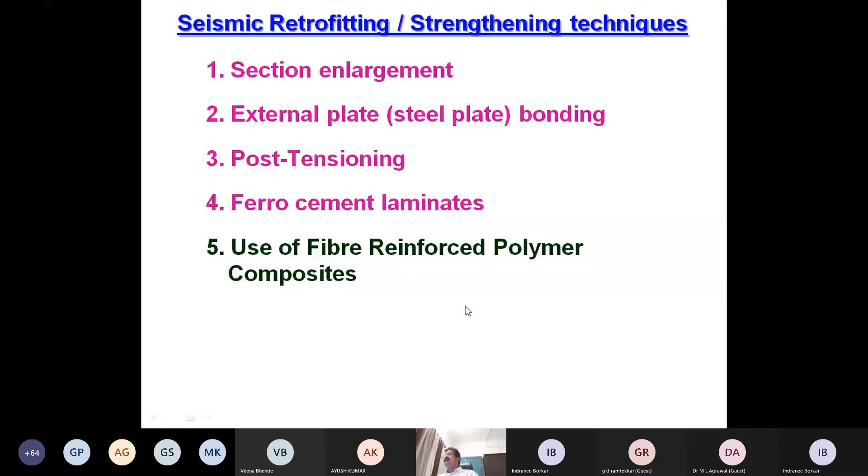Now for bending moment, actually for taking the tension due to bending moment, these reinforcements are already provided in the building, in the beam. Now as part of the strengthening or retrofitting, I need more moment resistance capacity of the system, and thus extra bars need to be imparted.

Now imparting extra bars is one thing, but making them monolithic to behave with the old beam is another thing. Our purpose as a structural engineer is that they should be made monolithic with the old structure so that the behavior of the whole structural system is there with the enhanced capacity of moment resistance and shear resistance.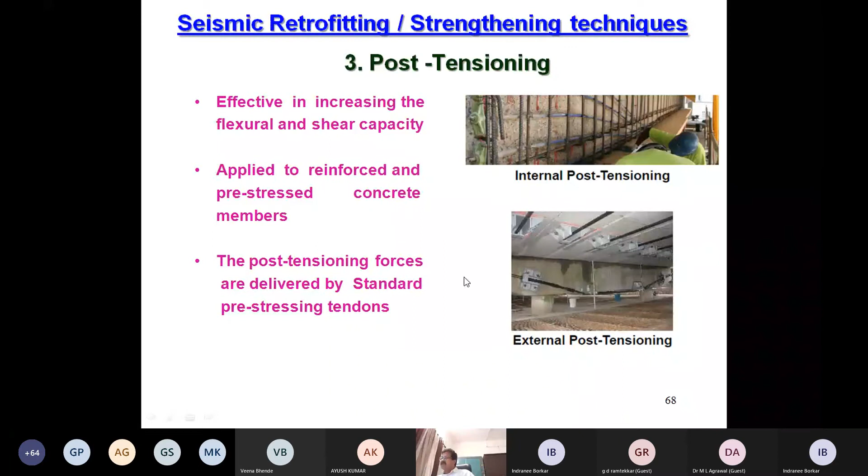In small cases, if there is seepage in slabs, people do a one inch or 2.5 centimeter layer of concreting. That is not actually enhancing the strength, though it may reduce the seepage. But if it is done with wire mesh, some strength enhancement is also possible. This is called ferro cement laminates, used for smaller work to enhance capacity.

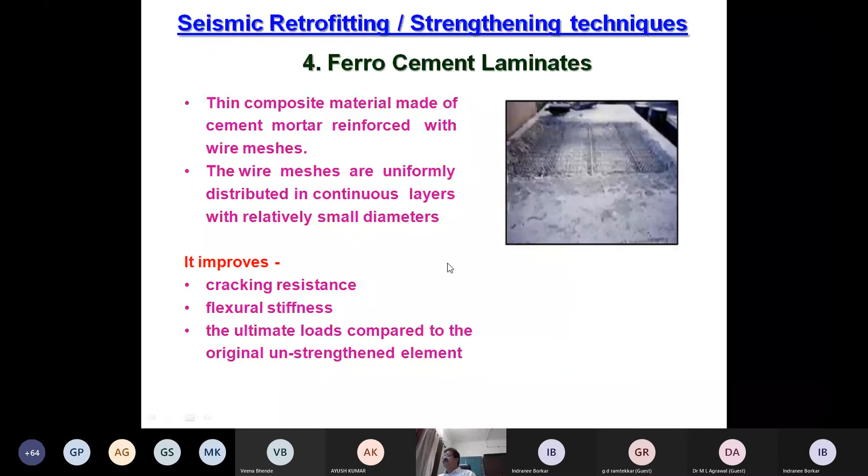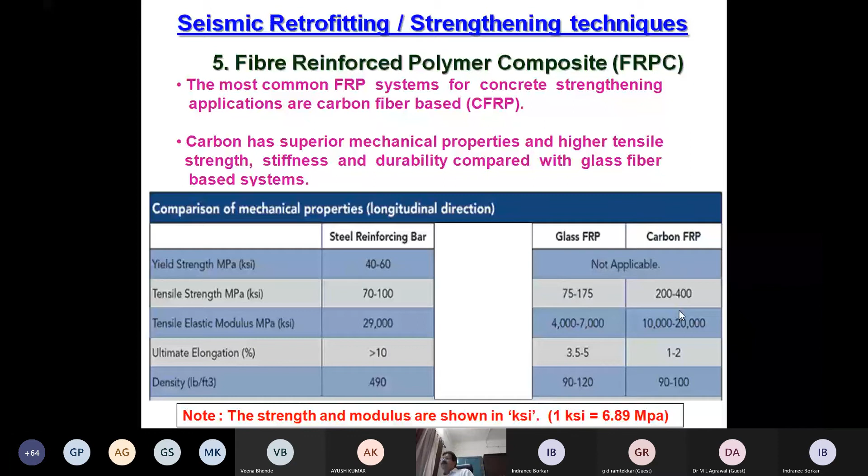So how to apply this? Temperature - you should understand that while applying it, caution must be taken. Temperature, relative humidity, and surface moisture at the time of installation can affect the performance of the FRP system.

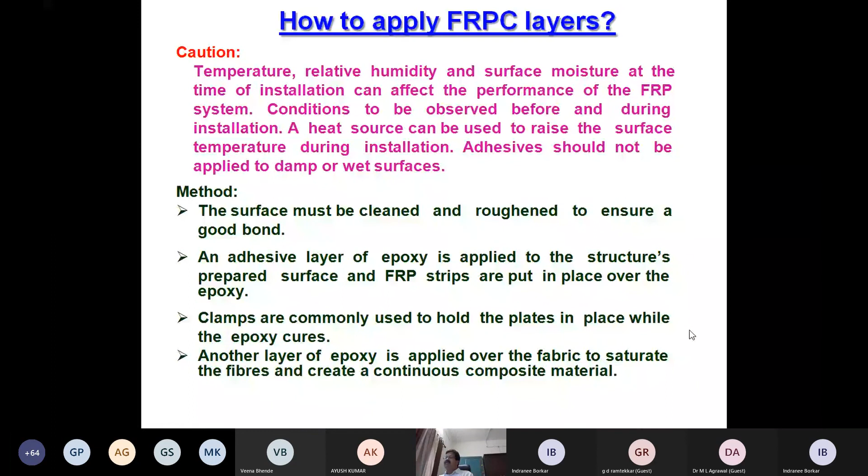If we need to increase flexural strength, that is bending moment capacity or moment resisting capacity, naturally its application will be on the tension side. So if this is a beam with tension side at the bottom, I will put this FRP at this location. I can also put it at this location as well to enhance its capacity so far as bending resistance is concerned. This is how I can put FRP over RCC beams.

If I want to enhance the shear capacity, then this kind of arrangement is required, so that the pasting of the FRP over the beam is needed so that its shear strengthening, shear resistance, can be enhanced.

When I require confinement, it is actually the confinement of concrete that is needed in case of a column. If it is confined, it is hugely strengthened. A concrete section's strength is much higher if it is confined. This is just an example I am giving.

Say for example, I have a heap of sand, and I sit on top of it. As soon as I sit, there will be large deflection, meaning I will come down by some amount. But if the same sand is in a container, a drum filled with sand, and you sit on top of it, do you think that kind of displacement will take place? It will not. Even though it is the same sand, only the confinement is changed. Because of this confinement, there is no such displacement, meaning it has a large capacity to take the load. Something similar happens, and this confinement is very well achieved by FRP wrapping around the columns.

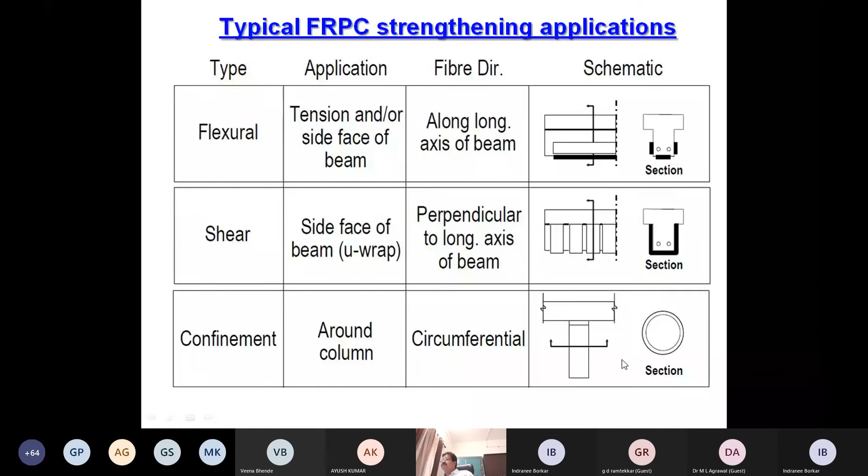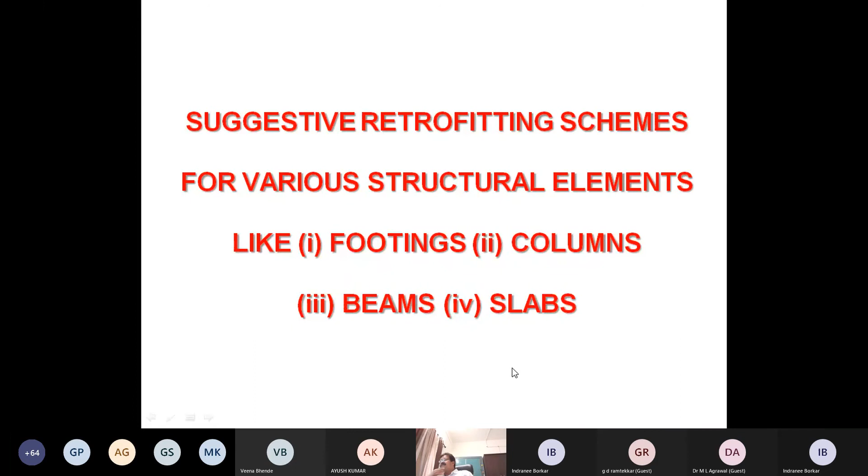These are the suggestive retrofitting schemes for various structural elements like footings, columns, beams, and slabs. These are the primary elements of our building system, so what way can we retrofit this kind of system? The first example is that of the footing.

Now the first example is that of the footing. In terms of footing, it is at the interface of a structural member, the RCC column, and the soil. In between them, the structural system that comes is this footing. There can be two types of retrofitting required.

One is when the soil is strong enough, there is no problem with the soil, so whatever size of footing is available is sufficient. But the structural system of that footing is not sufficient so far as the bending moment or shear force coming because of the enhanced loading on the structure. So what is basically needed is enhancement in the capacity of the structural system of the footing, not increasing the size. If that is the requirement, holes will be dug over the top surface.

With epoxy, shear connectors can be provided, and then new concreting can be done. This new concreting, because of the shear connection, will have proper monolithic connection with the old concrete, and thus the thickness or depth of the footing is enhanced. As we go on increasing the depth, its bending resistance capacity and punching shear capacity increase, and that is how this kind of retrofitting of footing can be done.

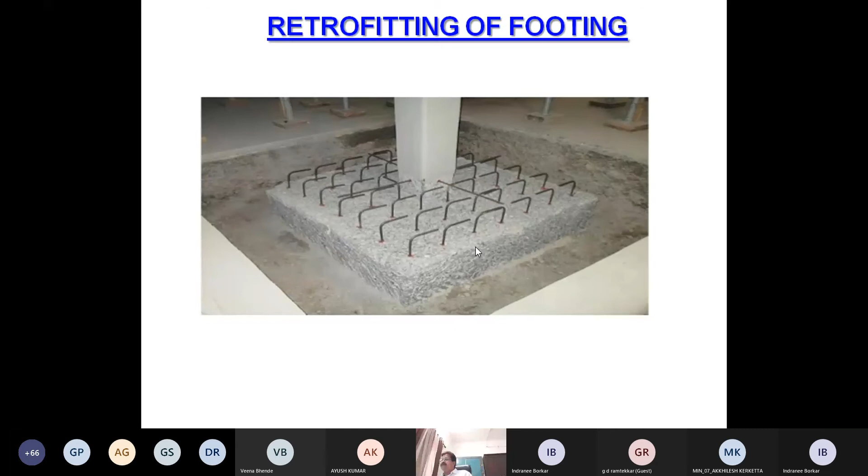If we require, in the other way, that the soil capacity is poor and hence I require as a part of retrofitting enlargement of the footing size, naturally the task is that this enlarged side must act monolithically with the old side. So shear connectors need to be placed on this side and properly connected. When new concreting is done, this new reinforcement will act together with the reinforcement of the old footing, and thus the enlarged shape will come into action, giving safety to the footing system.

Similarly, retrofitting of column - most of you must have seen this kind of retrofitting in many places - this is called jacketing using steel sections, angle sections, connected through welding plates. In this system, the column has its own capacity, and the new system of four angles on four sides has its own capacity, and that is how the total capacity of the whole column is enhanced, because this new system is added to the old system. This kind of retrofitting is done.

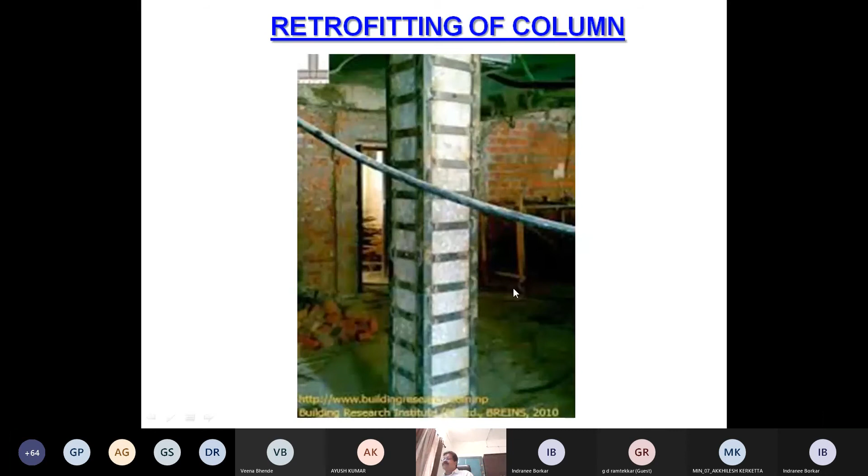There is another way of retrofitting, with steel bars and then concreting done. In this way, the size is largely enlarged, and that is the negative point of this kind of retrofitting, where the concrete column size seems to be too large and not aesthetically appealing.

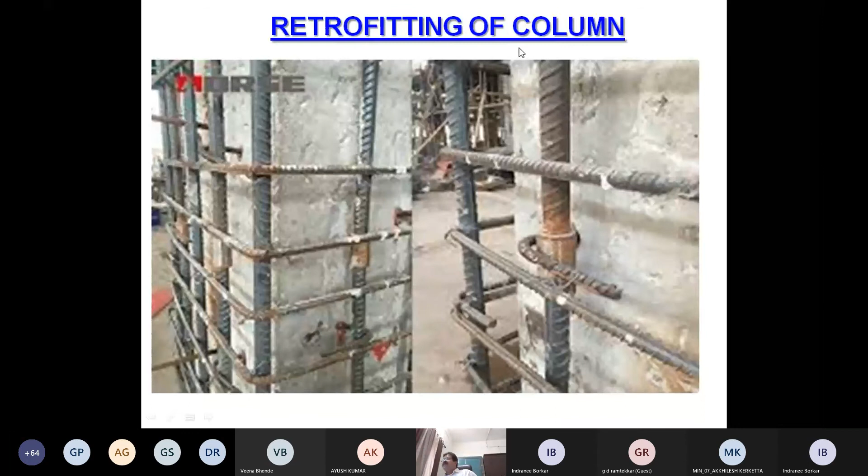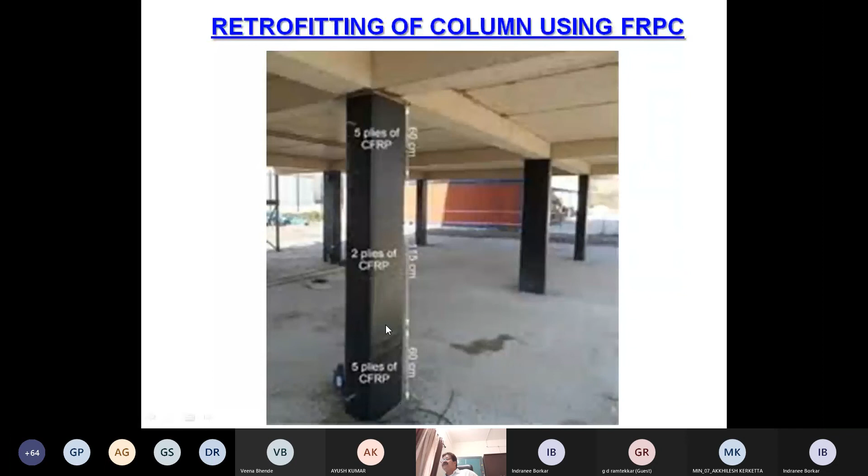The better part is using FRPC. This kind of wrapping is done using FRPC without enhancement in size - old column size and new column size remain almost the same, bearing only a few millimeters change. So this kind of wrapping is done, and it quite largely enhances the capacity of the column.

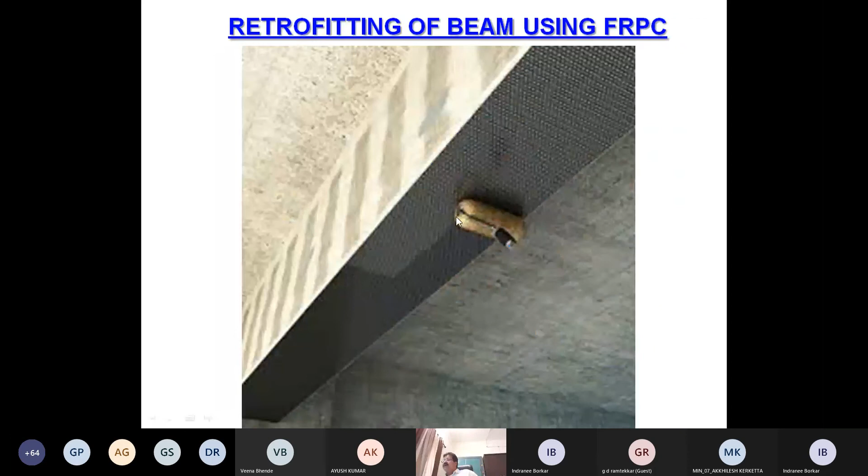Using FRPC at the bottom, the capacity of the beam can also be enhanced so far as bending resistance capacity is concerned. Similarly, vertical wrapping enhances the shear capacity of the beam without changing the size of the beam. This is the good point of it.

Similarly, the slab capacity can also be enhanced. As I said, one residential building converted to, say, a library building will naturally be subjected to more loads. To take that more load, I require more bending capacity. So this kind of activity can be done on the old existing slab to enhance its capacity, and thus the retrofitting can be done. This is the system of slab FRPC.

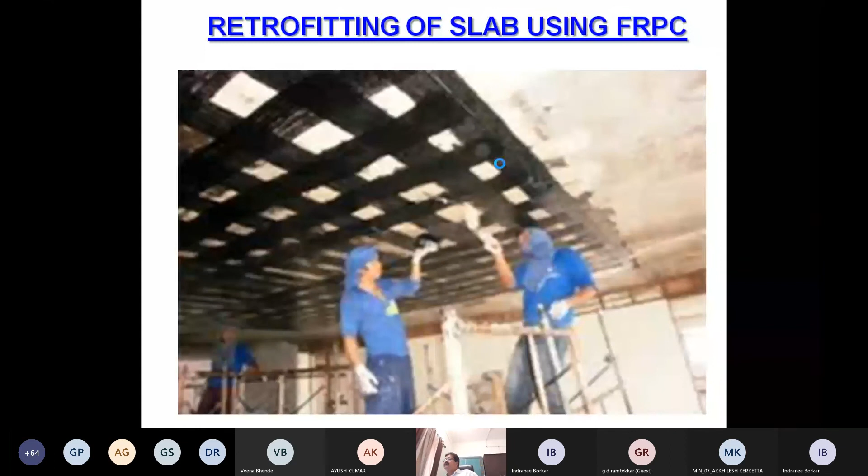Here I am ending my presentation. It is almost around 2 hours, so thank you very much for your patient hearing. I hope I am able to get you into the details of seismic considerations and retrofitting techniques. Thank you very much for your patience.